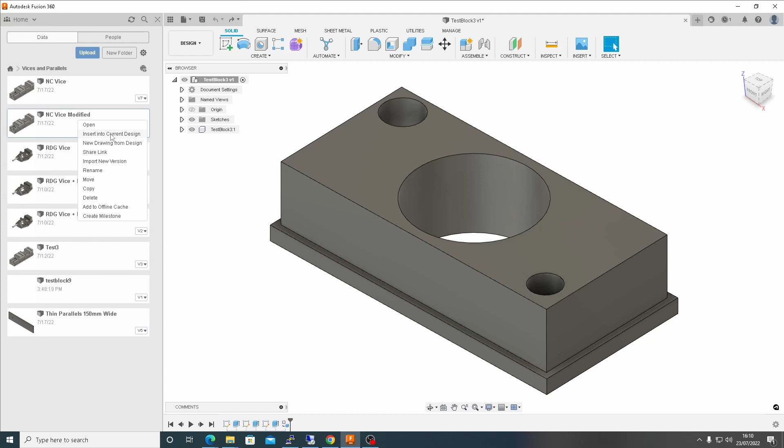So let's start by first importing the vice. Right click on the NC Vice modified here in the project folder and click Insert into Current Design. Just click OK and let's break the link. So now you've got the vice in there. It's not perfect, the orientation's out. So just click the top view and now let's rotate the vice.

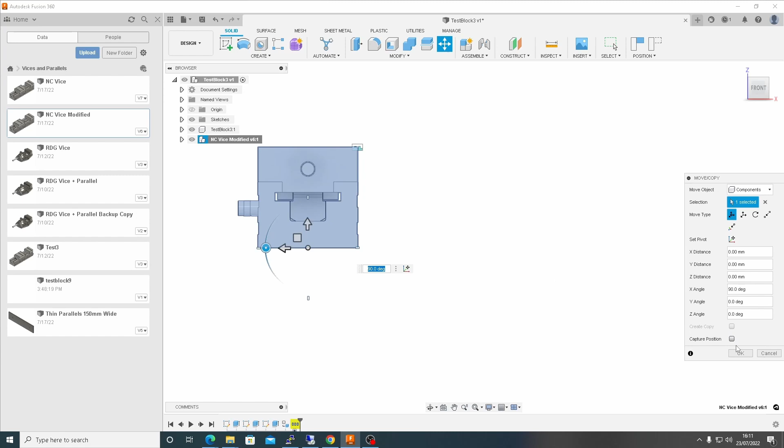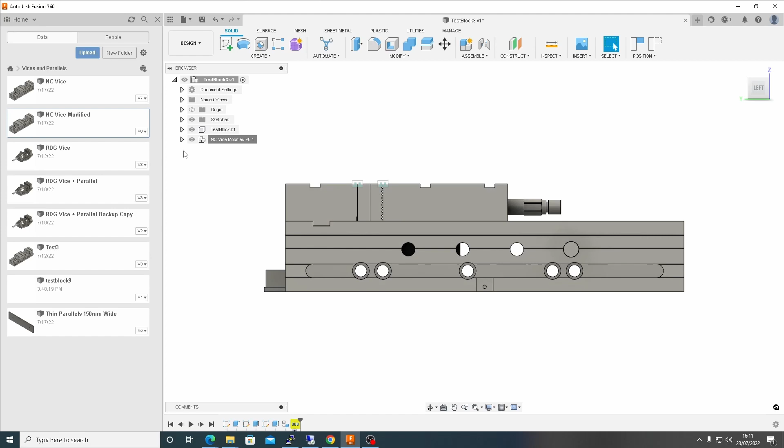So there you go, the vice is rotated now. The component we want to manufacture is not in the right place yet, but we'll sort that out. So let's first move the moving vice jaw out of the way. So go into the vice, moving jaw, and select move copy. So that's out of the way now. Click OK.

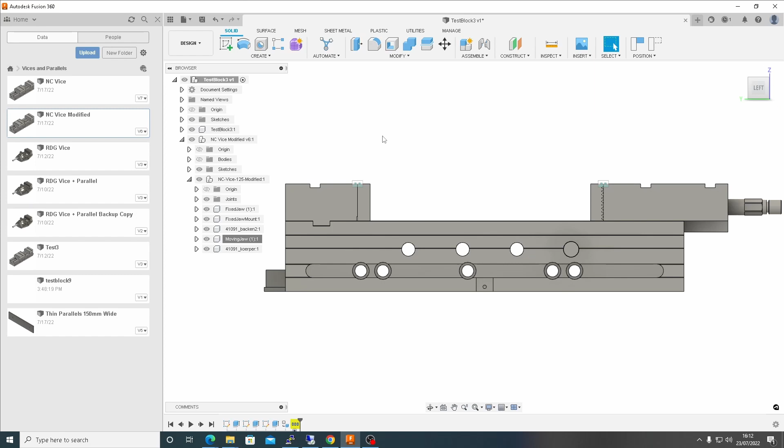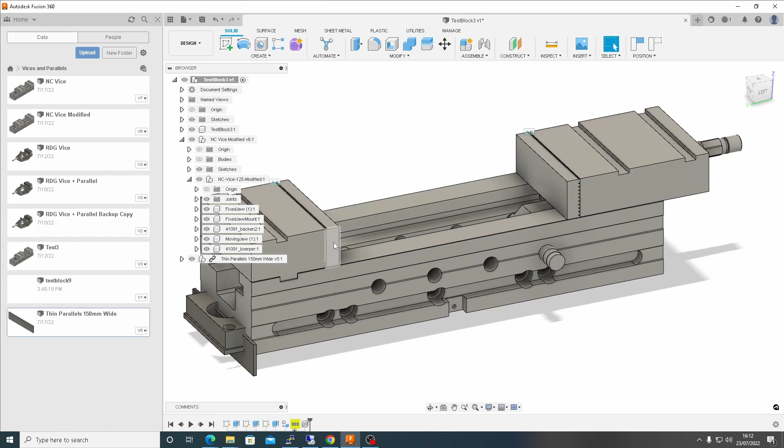We want to import some parallels now, so we can set the component on parallels in the vice. So I've got some thin parallels that I modelled up earlier. So right click, insert into current design. Click OK. So obviously everything's in the wrong place at the moment. So let's start by first moving that parallel so it's in the right position, which is going to be against this vice jaw face here.

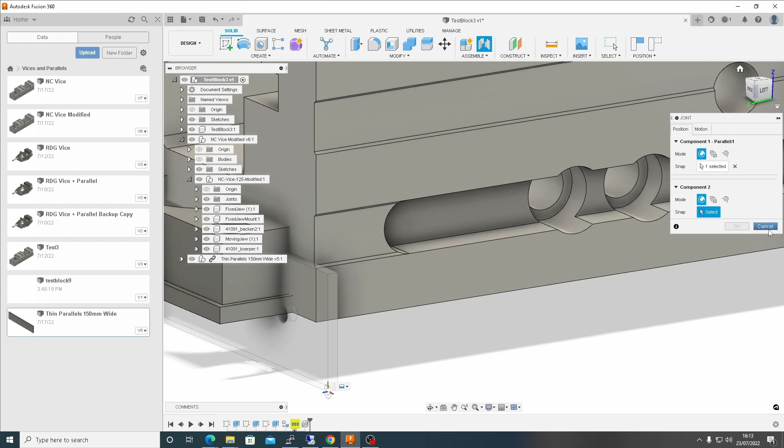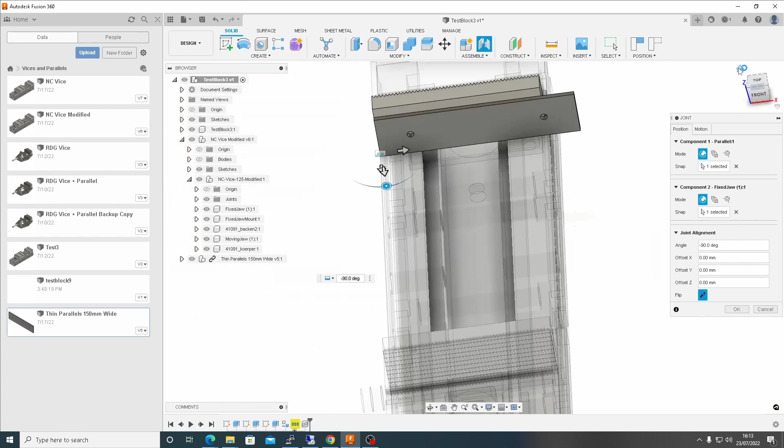So go to joint, select the first snap point. So if you hover over the face that you want to joint on and get close to the corner, it'll snap to it. So select that back corner there. Now select the vice jaw as a second snap. So that's a bit better. Click OK. Let's break the link. Capture position. There you go.

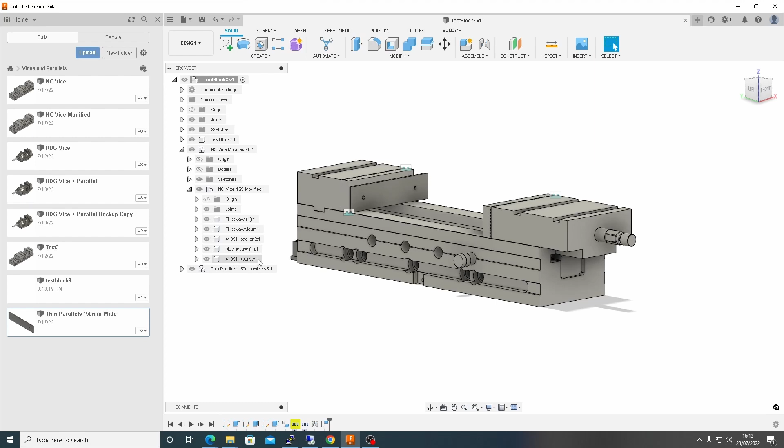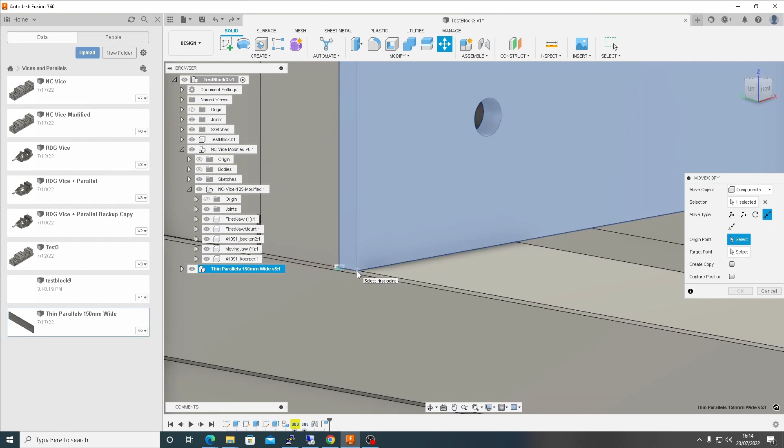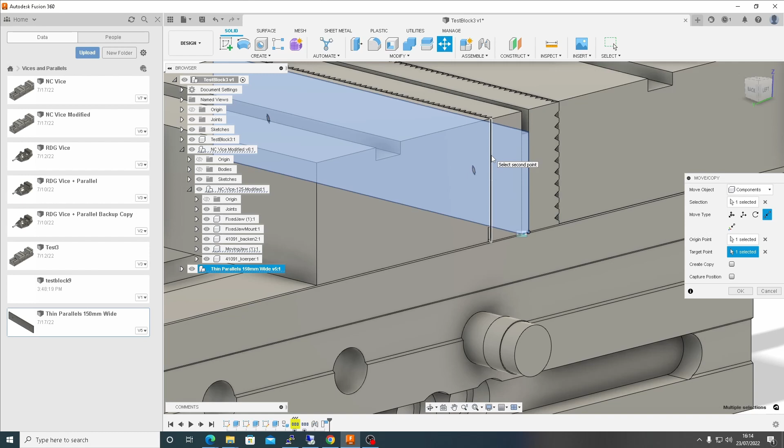So we also want a parallel, in this case, on the moving jaw as well. So let's do that now. Select the parallel. Right click, move copy. Create a copy. We want point to point. So we want this point here. Move it out of the way a bit, there you go. We want that point there. And the target point is going to be this corner here. Let's move the whole thing now. Create copy, there you go. So if you do make that mistake, just click create copy through, click OK, you'll be fine.

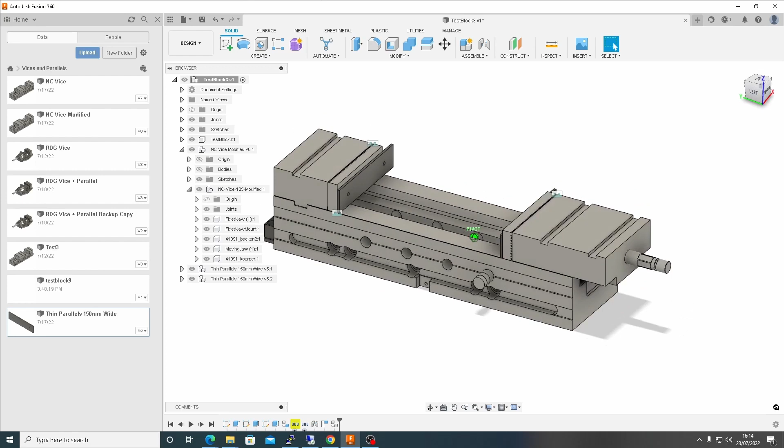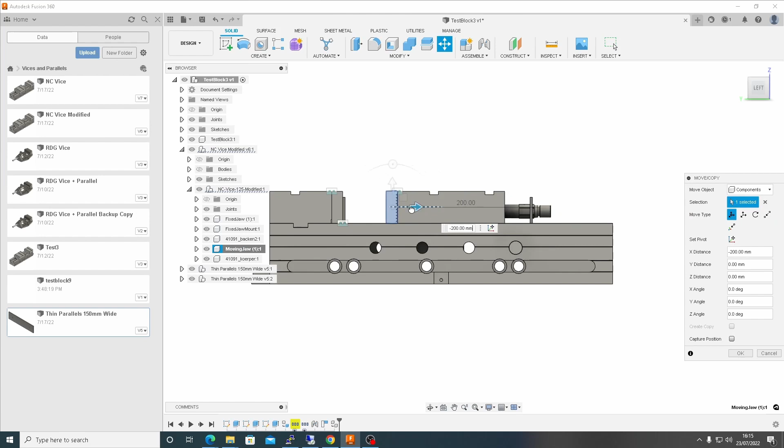So there you go, we've got a parallel on both the moving jaw now and on the fixed jaw. The trouble with this one on the moving jaw is because we've just done a point-to-point move, if we move the vice jaw, the parallel is just going to stay where it is. So for instance, if I go move copy on the moving jaw, do a free move, you see the parallel is just staying where it is. Obviously that's no good. So let's fix that with a joint.

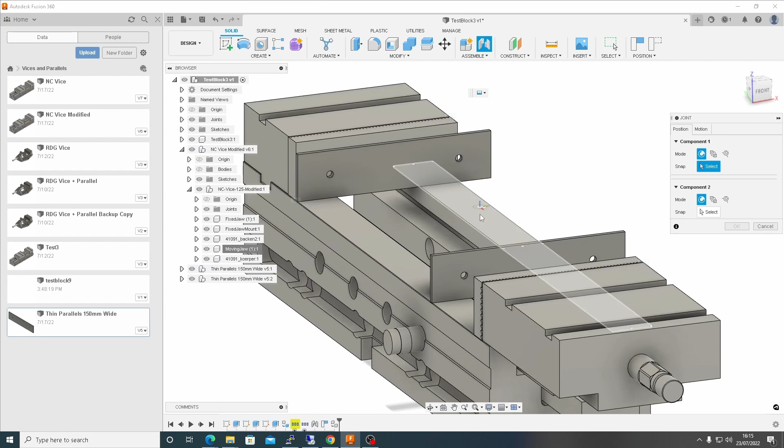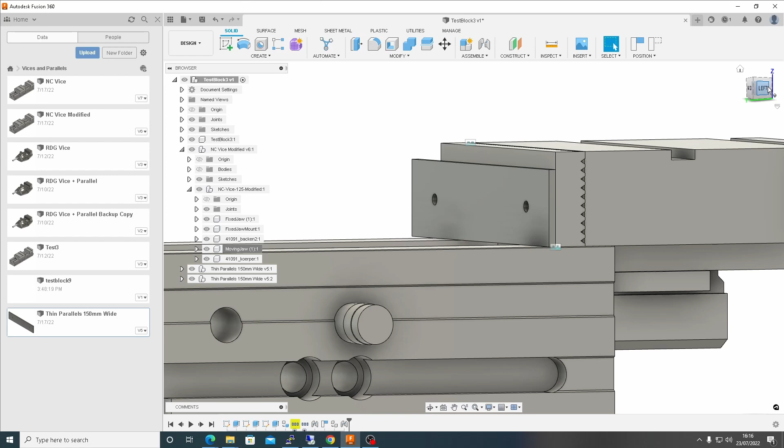Let's move that out of the way a little bit more. And we'll create a joint. So we're on our back face there. And the second snap point, we're on this back face here. Click OK. So now when we move the moving jaw, right click move, you see the parallel moves with the jaw, which is what we want.

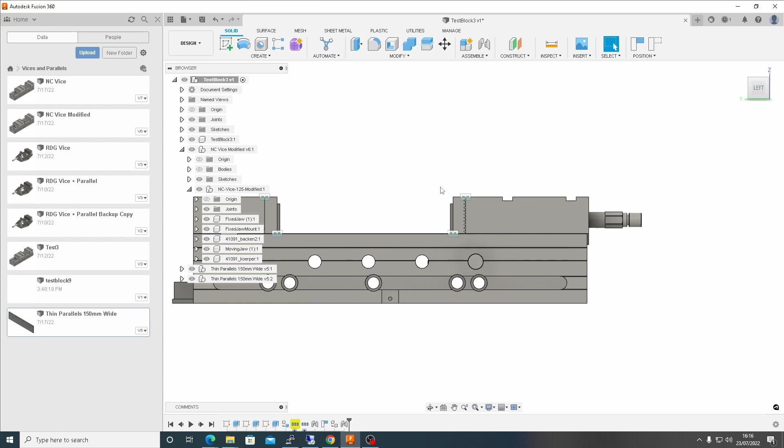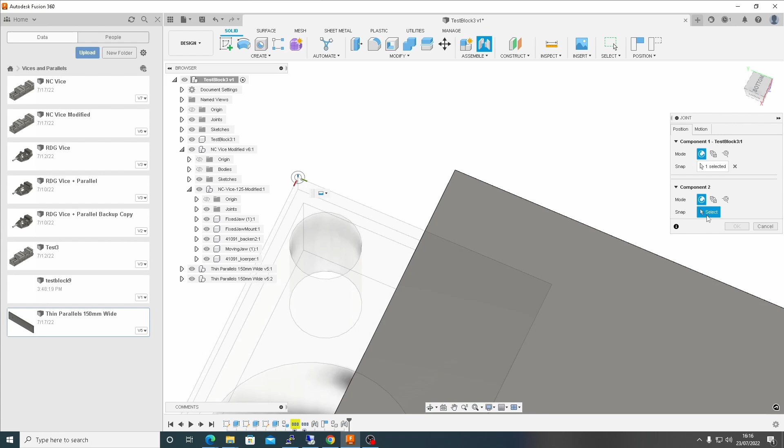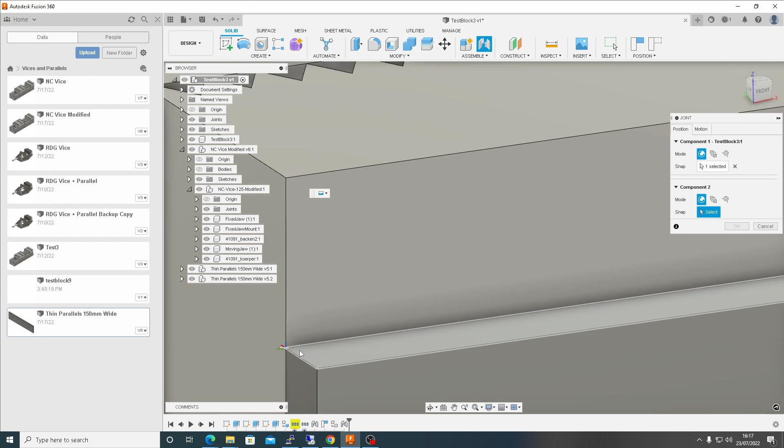So we still need to fix this component because it's at the back, it's not in the right place at the moment. So again, we'll create a joint. And we want this underneath part of the component on this face. That point there. And our second point, we want on top of the parallel. There. So again now, next we want to move this jaw all the way up to the component.

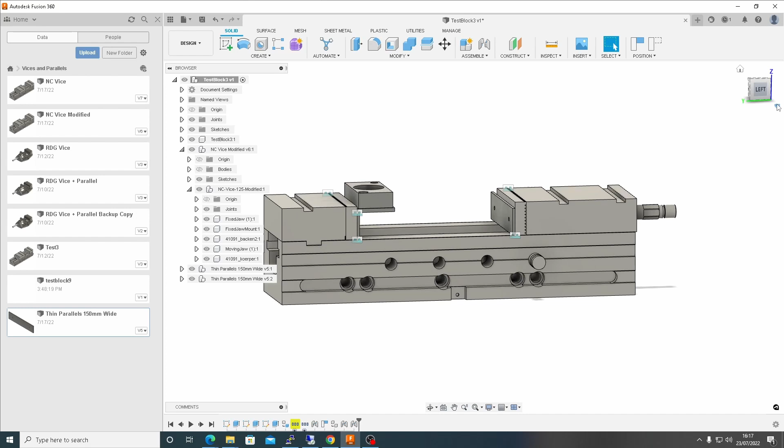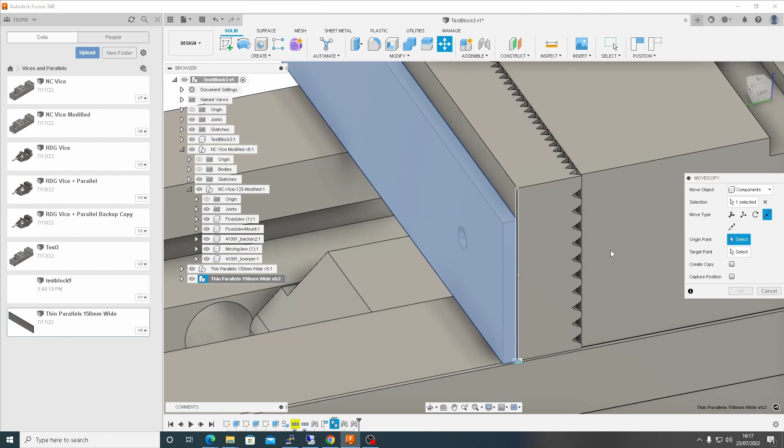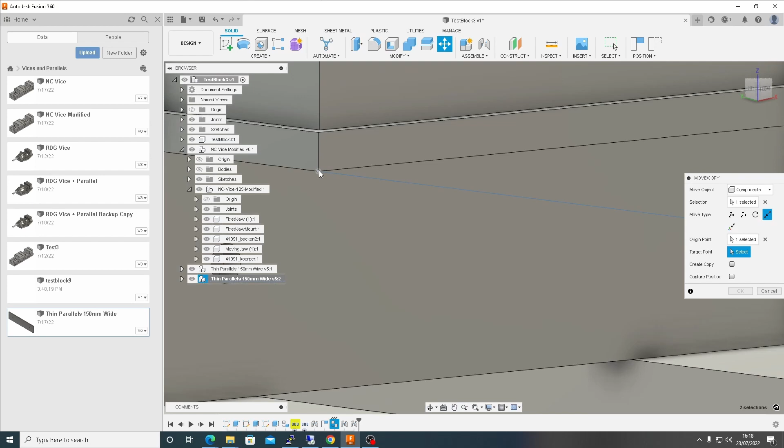So what you need to do, you need to move this corner here, the back part of the top of the parallel, this point here, we want to move that against the component. So let's do a move. So just use a parallel, do a move, point to point, the origin point is going to be this corner here. That's going to move to this point here. Click OK. So there you have it.

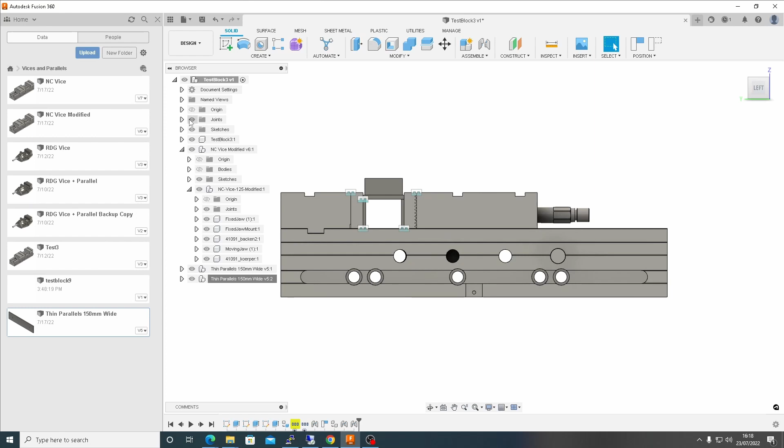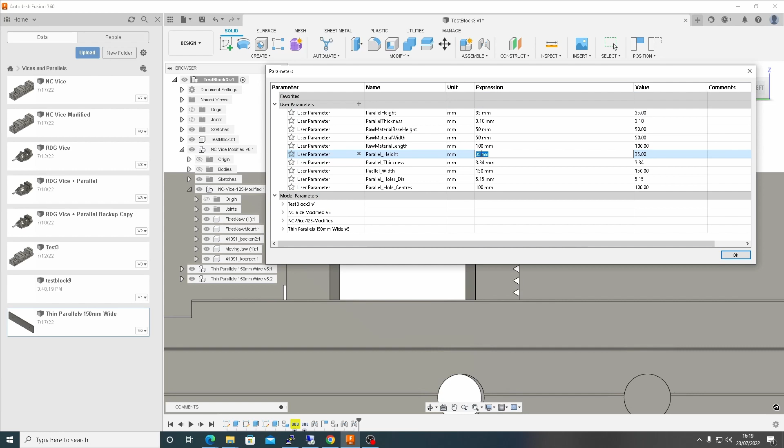But you can see where we're going to machine this contour, it's going to collide with the vice jaws. Let's click off those joints so we can see a bit clearer. You see there's a bit of a step there. So unless you use a tool diameter that's smaller than this gap, it's going to collide. Obviously that's not going to be ideal. So let's change the height of those parallels. When I create the parallels, I actually use parameters. So let's change the height in the parameter to 40mm. And now we're done.

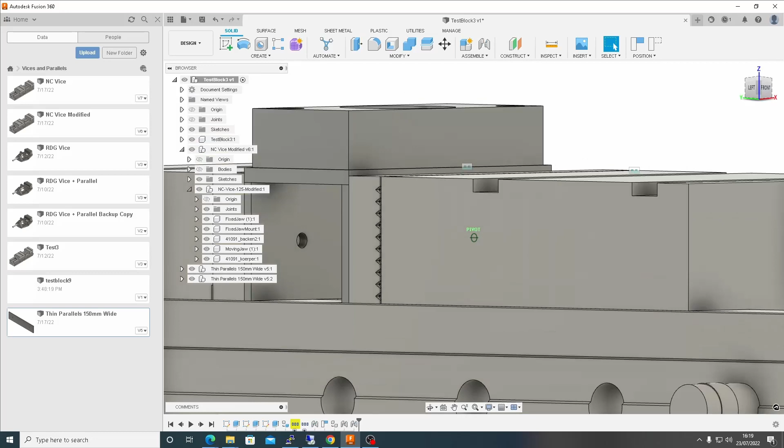So that's the basic part of it done. So I think I'll do a separate video, part 2, and I'll show how we can use this in the actual CAM simulations. So thanks for watching, and look out for that second part of this video.